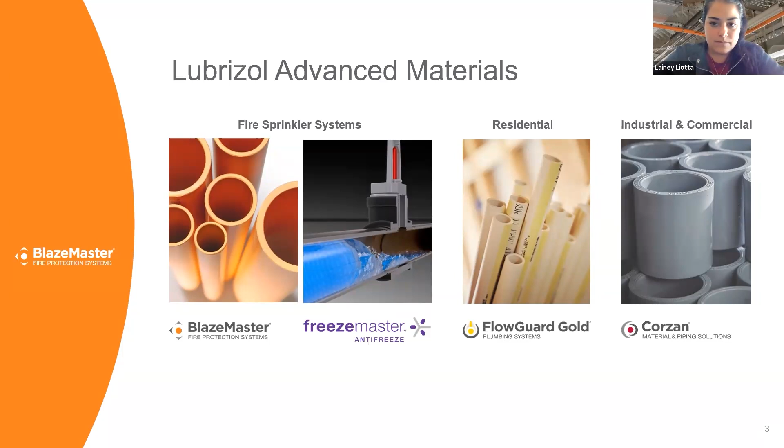As I mentioned on the last slide, Lubrizol manufactures the compound, so the powder and the pellets that go into the pipe and the fittings. We do not manufacture the fittings and the pipe themselves. We have manufacturing partners that actually make the pipe and the fittings. In North America those are Johnson Controls and Viking, in the United States and Canada. In Canada and Latin America, we have IPEX, and GF Harvel sells pipe only into their ASD systems. We're very proud of our partners and the quality and expertise that they bring to market.

So when you are using a Lubrizol product or BlazeMaster CPVC, you not only get the backing of the scientists of the company that invented CPVC, you get the backing of the leading fire protection industry experts in Johnson Controls and Viking.

So in all, today, we're going to understand from Michelle the science of chemical compatibility at a high level. If I can understand it, I know that you can understand it. And Michelle does a really great job at sort of dumbing down, so to speak, a very complex topic. And then I think more importantly, we're going to understand how we apply that science and that understanding of compatibility onto the job site, because science doesn't always equal the practicalities or the real world situations that we face in the field. So we're going to talk about both today.

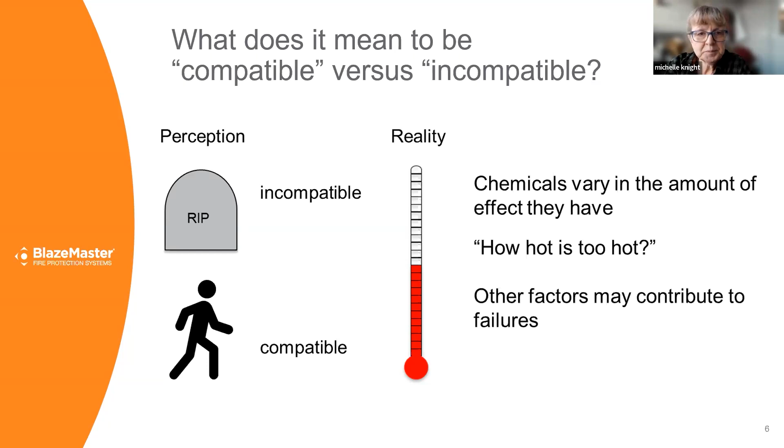Metals can be sensitive to just the oxygen in the atmosphere. Water can cause corrosion of a lot of metals, or the quality of the water, if it's high in sulfur or high or low in pH, that can be corrosive. Microbial growth, especially in a stagnant system like a fire sprinkler system. A lot of microbes, when they metabolize whatever it is they're eating, they excrete acids, and that can cause corrosion of metals. And everybody's familiar, of course, with galvanic corrosion, where you just have two different types of metals in contact with each other.

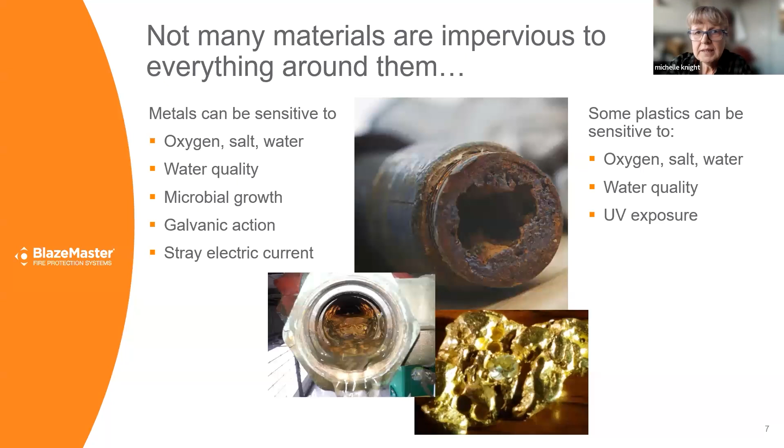Some types of plastics can also be sensitive to oxygen in the air, UV light exposure, water quality. And so you just need to be aware of the material that you're working with and what it might be sensitive to. So today we're going to focus specifically on CPVC. And if Scott can move to the next one.

So focusing on CPVC, what is it exactly? So our starting raw material is PVC, the same sort of PVC that you might use in industrial or commercial water piping. And we take that and we add extra chlorine to it. So PVC is already 57% by weight chlorine. It's polyvinyl chloride. And we add more chlorine to it using UV and heat as catalysts, and that makes CPVC. So by number, we're adding about 50% more chlorine atoms to the PVC, and that gives it higher temperature performance, better flame and smoke performance, better chemical resistance to acids and corrosives, and so forth.

So that's just the CPVC resin itself, but CPVC is a compounded product, so we take that and we add additives to it. We add things like heat stabilizers, UV stabilizers, pigments, processing aids, impact modifiers, and so forth, to make a final compound. And we sell that compound in powder and pellet form. So you see some powder and some pellets there on the right. That is the product that Lubrizol makes. Pellets go into fittings, powder goes into pipe.

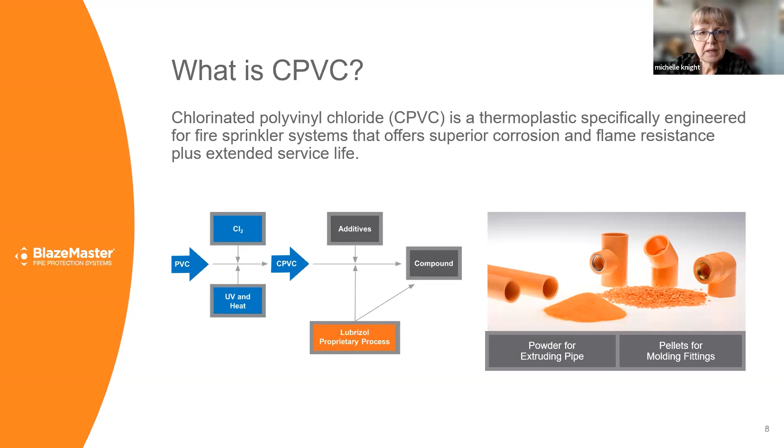And I like to talk about CPVC as kind of being a little armadillo of a molecule. Those big chlorine atoms are huge. They are kind of like armor plating on the backbone of the molecule, and they prevent acids, corrosives, oxidizers from getting in and breaking the back of the molecule and breaking it down into little bits, which would be how it would degrade.

One question that we frequently get is about UV light. We make CPVC, as I mentioned on the previous slide, using intense UV light. And when we use that intense UV light, we're making free radicals, which are very aggressive chemicals. And we're doing that in the presence of high concentrations of chlorine gas, which is a highly oxidative chemical.

So when I call it a little armadillo of a molecule, that's because it is. It is really, really resistant to these sorts of things that can break down other plastics and other types of materials: UV light, hot, strong oxidizers like chlorine and free radicals. CPVC is really quite impervious to those to a high degree.

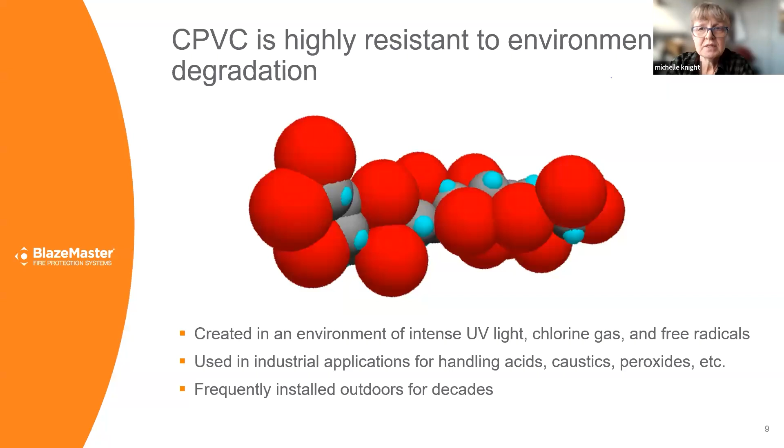And so in industrial applications, we're used for handling battery acid, caustic soda, hydrogen peroxide at high concentrations. And all of these very corrosive chemicals really have little to no effect on the CPVC. And one other thing to mention about our industrial products is they're frequently installed outdoors in pipe racks in chemical plants for decades, and they maintain their pressure bearing capability just fine. So moving on to the next slide.

So when we get questions about UV light, we can very confidently say there are no incompatibility problems. There's no degradation problems with UV light and BlazeMaster. It doesn't affect the long-term pressure bearing capability. We've tested aged pipes that have been out in the sun for years, and they still maintain their pressure bearing capability after a very long time. So we don't see any degradation, any molecular breakdown of the CPVC.

The UV light will kind of fade the orange pigment a little bit, so you might see some discoloration. And it does age the pipe and fittings a little bit faster. So every material ages, everything gets a little tougher and harder to work with the older it gets, and UV can accelerate that a little bit.

So you may experience some difficulty cutting the pipe without cracking it if you install some pipe that's been lying out in the sun for a while. But if you can get it installed without cracking it as you're cutting it, it will maintain its pressure bearing capability and perform just fine.

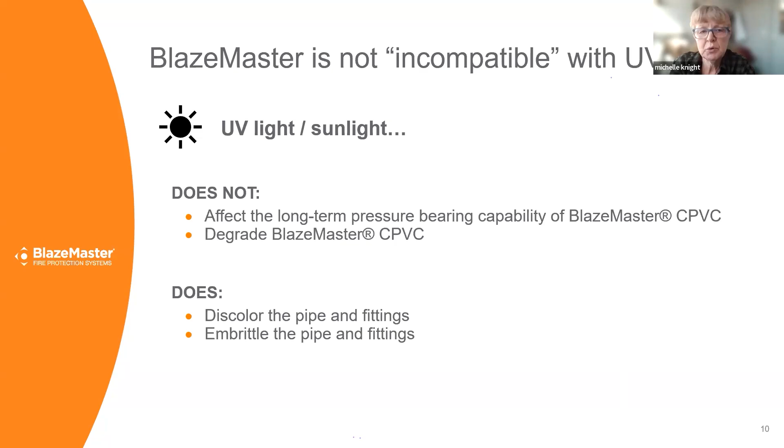So the next slide talks about what holds polymers together, because when we talk about compatibility and chemical compatibility failures, we're going to be talking about what pulls molecules apart. So I'm just very briefly going to talk about 3 different kinds of polymers that you're probably familiar with, even though you might not know they fall into these categories. So polymers can be held together by 3 different things.

One is just molecular entanglement. Plastics are all very, very long chain molecules. And in some cases, we're just tangling those chains up together, and that makes a solid piece of plastic. The good thing about this kind of plastic is that you can solvent cement it. You can dissolve it with solvents and use cements to put it together. And you can weld it, heat weld it, which is often done in industrial applications.

But it's not as easy to weld, say, as something like polyethylene, which you see in the center there. This is a crystalline material. It melts. CPVC, you may have seen a video of CPVC with a flame applied to it. It doesn't really melt, it just kind of chars in place. Whereas polyethylene, polypropylene, those kinds of things, when you put a flame to them, they can tend to run like candle wax because they melt and become liquid, literally, when heat is applied to them. Makes them easy to weld, but not very easy to join with solvents.

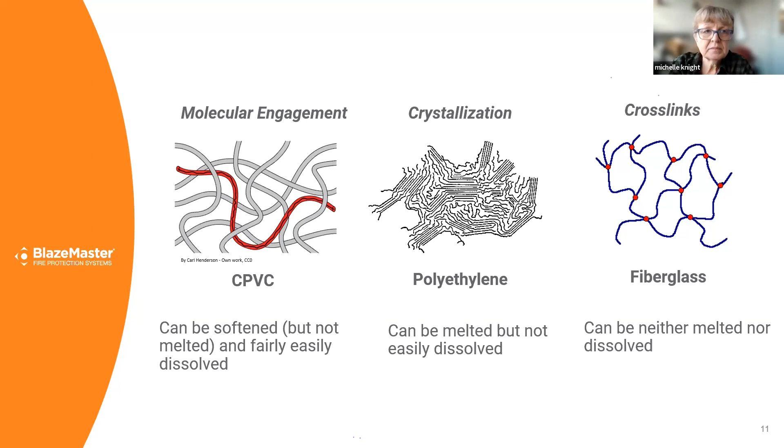Moving to the next slide. So in order to cause environmental stress cracking, which is the most common form of chemically driven failure in CPVC, as I mentioned earlier, you may need more than just the presence of the chemical. Other factors may be contributing to the failure.

It's very similar with chemical compatibility and chemically driven failures of plastic. Besides just the presence of the chemical, we also have mechanical stresses on the part that may be contributing, and the quality or strength of the material itself. And so we're going to talk now about all these 3 factors. We'll start with material and part quality. We'll talk a little bit about stress, and then we'll move on to the chemicals after that.

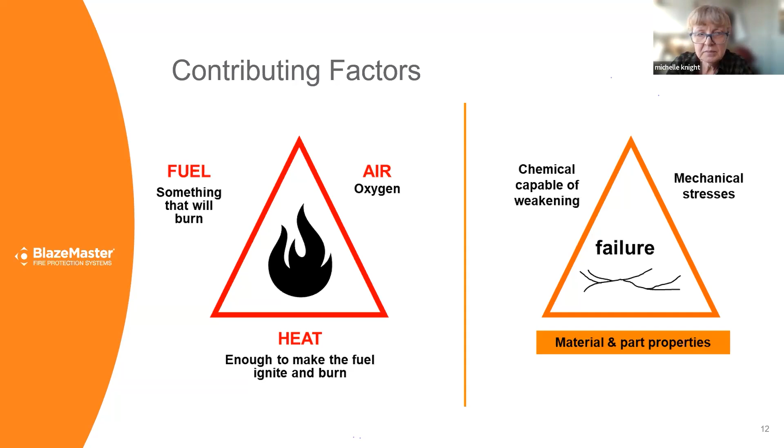And so besides just shaping the material into the part, we need to get all those molecules tangled up, and it's not necessarily as easy as it seems. So this just speaks to the importance of choosing a quality manufacturer when you're choosing to buy pipe and fittings made out of CPVC.

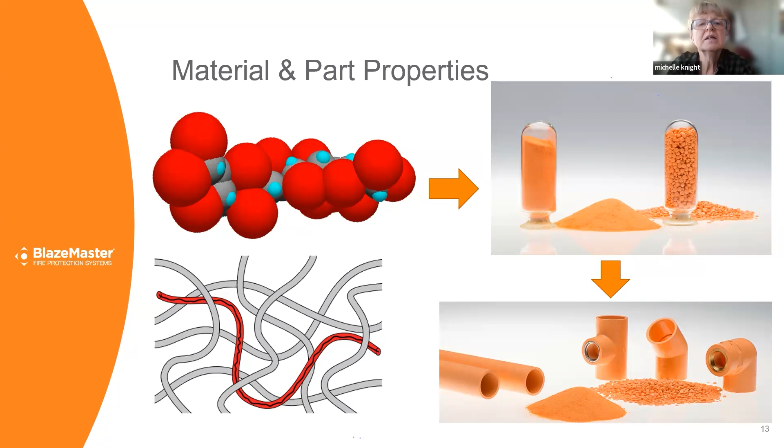If you've seen a burst test of a solvent cemented assembly, you'll know that it doesn't fail in the joint, it'll fail in the pipe. It makes a really strong, tight joint, but it does apply some stress to the fittings. And so when you have chemicals applied to the outside of a pipe or fitting system, as we'll see a little bit later, that stress in the fitting may be a contributing factor to the failure.

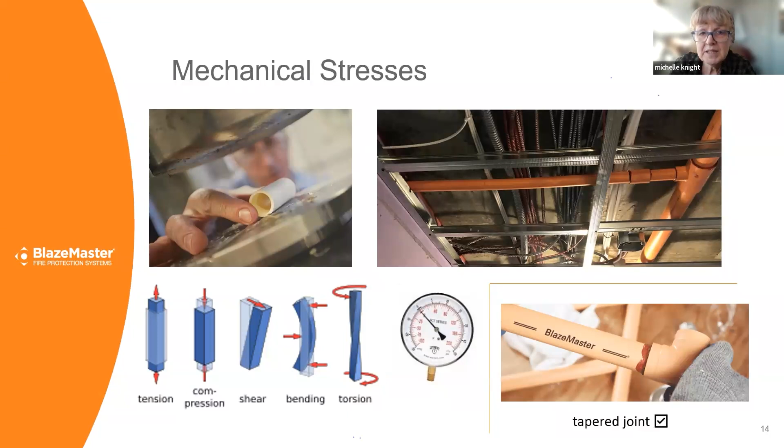So all of these different types of things can also contribute some amount of stress to the pipe or fitting. And so in the presence of a chemical that can cause environmental stress cracking, these may contribute to causing a crack to start.

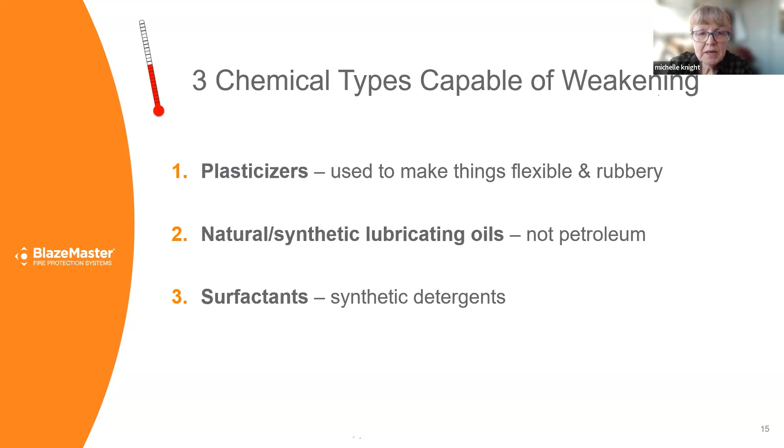So plasticizers are very aggressive. They're used to make hard plastics soft and flexible. And when you have a hard piece of pipe, you don't want it to become soft and flexible. It's not going to hold pressure very well. So those are very aggressive. And then the synthetic oils are kind of in the middle of their effect. They require some amount of stress in order to get the cracks going. And then surfactants are even less aggressive, but they can cause cracking of the CPVC in certain instances. So coming up next, we'll be talking about where you might find these types of chemicals in a job site.

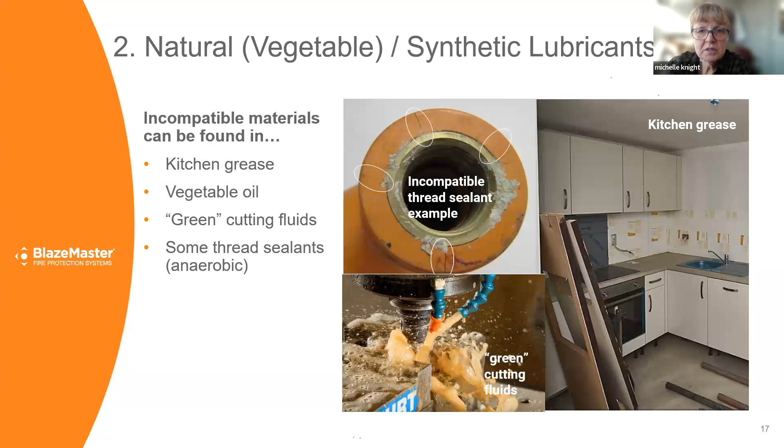And so you might find these in some types of leak detectors. So the soap blowing bubbles types of leak detectors, those obviously have some type of soap in them. There are some compatible products available on the System Compatible program again.

Some types of cleaning products, disinfectants, mold and mildew killing chemicals, some of these may also contain incompatible chemicals. And again, you're going to want to check the System Compatible program, because compatible versions of these types of chemicals can also be found on the System Compatible program.

So other types of incompatible things might be, again, we mentioned cologne and perfume earlier, termiticides, insecticides, fungicides. Some of these contain solvents, some of them contain these similar types of incompatible detergents in order to disperse the insecticide in the water, for instance.

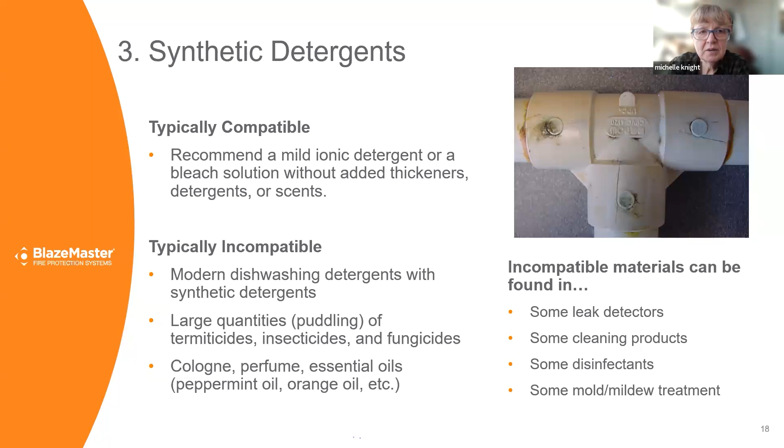Because, as you may be aware, polyurethane foam is a two-part product when it's applied like this. So there's a part A and there's a part B. And CPVC is actually not compatible with either part A or part B. But once they have reacted and foamed up, and if you've ever watched this stuff applied, you know that it reacts and foams up pretty darn quickly, as soon as that process is complete, the final product is compatible with CPVC.

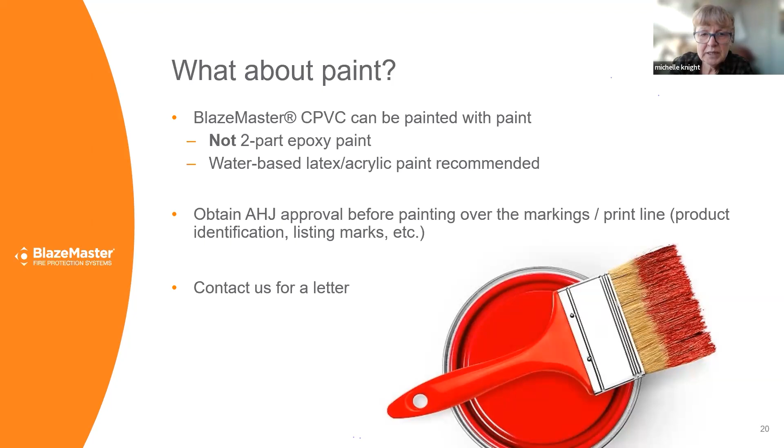This kind of mylar ducting insulation that you frequently find in building insulation, that's not a problem. We get a lot of questions about sprayed on fireproofing for steel. That is also not a problem for CPVC if it gets sprayed on it. If you need to use Sharpie markers on the pipe, go right ahead. Those are not a problem.

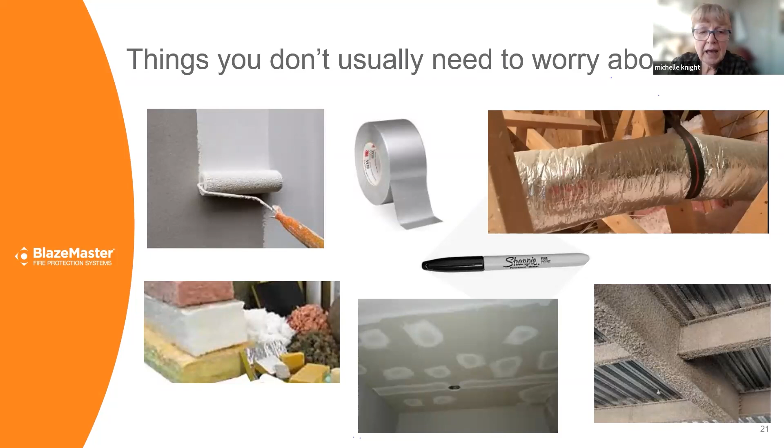And again, as I mentioned earlier, most types of tape, including duct tape, Scotch tape, masking tape, blue painter's tape, strapping tape, paper tape, any kind of tape, except what did I talk about earlier? Electrical tape. Don't use electrical tape, but any other kind of tape will be fine. And I think from here, Lainey is going to tell you where you can find all this useful information on the System Compatible program.

Absolutely. Thank you so much, Michelle. And we have a ton of questions that we'll definitely get to at the end, those that relate to compatibility for sure. So Michelle will join us back on at the end. Again, for those of you who were not on at the beginning, I am at an airport and I apologize for the background noise.

But now that Michelle went over all of the science and things to watch out for, and you have a better understanding of what kinds of chemicals can adversely affect BlazeMaster and why, let's go over what we do with that information and how you can ensure compatibility on a job site. We have something called the FBC System Compatible program, and it really takes the guesswork out of chemical compatibility with Lubrizol CPVC products such as BlazeMaster. FBC stands for our brands of CPVC, FlowGuard, BlazeMaster, and Corzan. So that's where that comes from.

Lubrizol, or a Lubrizol company, invented CPVC, and we invented the compatibility programs to go along with it. We identified a need for that, and developed testing protocols, et cetera, as well as the FBC program that is very easy to use and straightforward for all trades to use in the industry. Michelle will explain a bit more about this later, but while we absolutely have the testing capabilities ourselves to test for compatibility and have developed those protocols, just to add credibility to it, we have a third party actually administer the program and do the testing as well, to make sure everything is neutral and repetitive and done correctly.

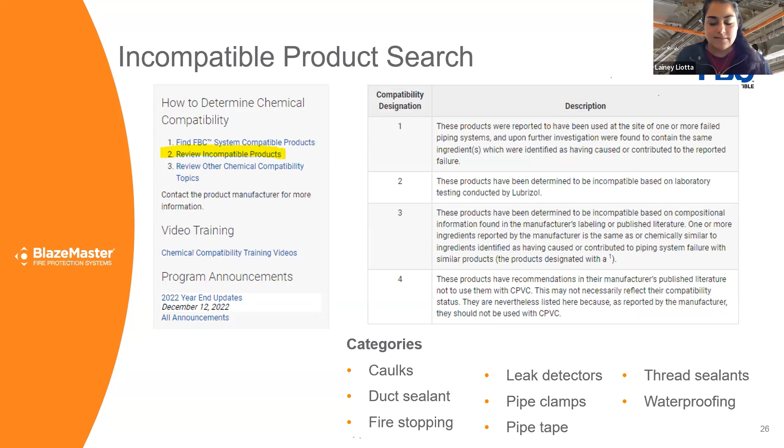And if the fire caulk in this example that you're looking for is still not on that list, that's a good thing. You will move to my favorite part of the website, the review other chemical compatibility topics. And so this list on the screen here is all of the product categories that we provide detailed guidance on in terms of what is compatible, what isn't compatible, if using one of these might affect the listing for BlazeMaster, etc.

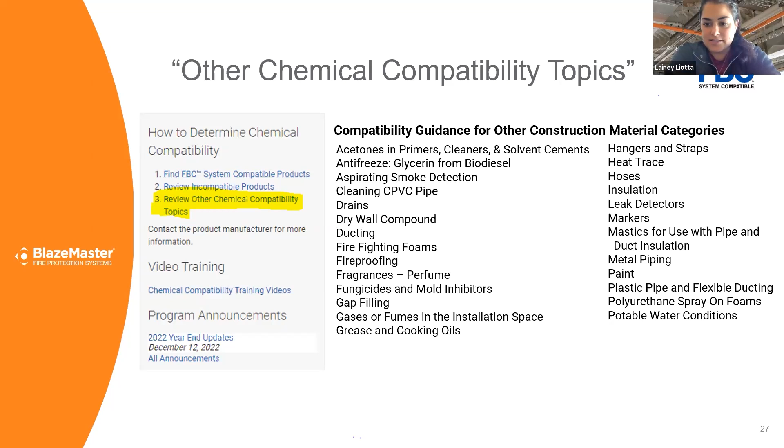As you can see, there are various product categories there, and there's an example on the next slide of the type of guidance that is provided. We have fragrances, heat trace, and plastic pipe and flexible ducting guidance, just screenshots on here, but I just wanted to show examples of some of the verbiage and instructions you get by going to that section of the website and just clicking the drop-down box.

And I think someone in a Q&A on here asked if you could get a PDF of something for compatibility, etc. This is our version of providing a PDF. Basically, go to this website, and if you need to print it out in PDF form, you certainly can. But that is how you should be submitting the information that you have to show to the AHJ or whoever else needs it.

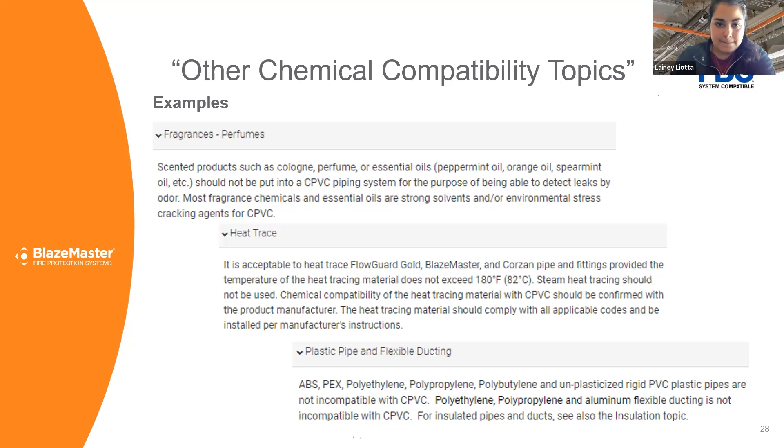So I'll invite Michelle to come back on here to explain how products get added to the FBC System Compatible program. As I mentioned before, I think I've heard in the field, specifically from our competition, rumors that Lubrizol profits off of the FBC System Compatible program because we do charge to be part of it, but really that charge only covers the expense of testing through that third party.

So there's no profit involved in that because compatibility issues are not good for the industry nor for us. So we would not want to monetize it in any way, but we do just have to cover the cost of testing. And I'll let Michelle explain quickly the process that a product has to go through in order to become part of the FBC System Compatible program.

Okay, so the System Compatible program has been out there for over 20 years, and when we started it more than 20 years ago, we already had a good 15 years of experience in the fire sprinkler industry, a good 30 years of experience in the plumbing industry, and so we based our testing criteria on that experience. We knew some types of materials were compatible, some types were incompatible, and we used that experience to draw distinctions between what's good and what's bad, basically.